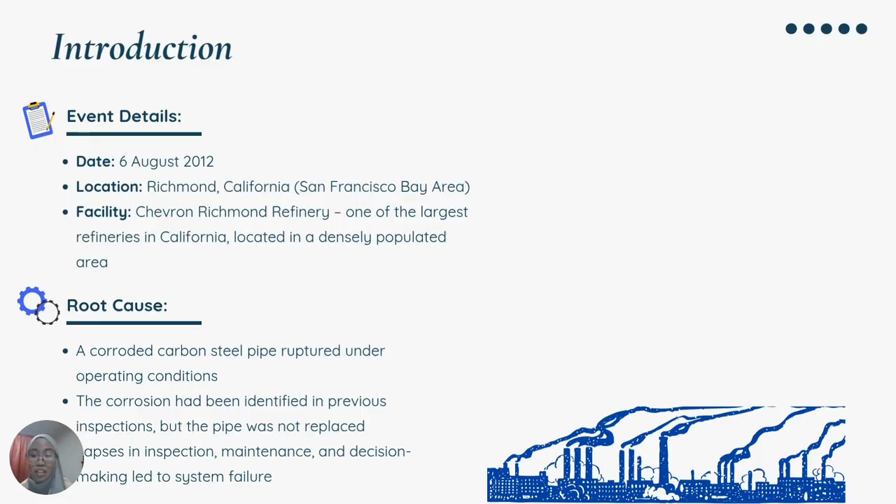Let's take a brief look at the timeline of key events. As early as 2002, internal inspection reports flagged a specific carbon steel pipe as vulnerable to corrosion. Multiple recommendations were made to replace the pipe, but they were not followed.

Then refinery workers detected a leak but decided to keep the unit running while investigating the issue. In the evening, the accumulated vapor ignited, resulting in a massive fire.

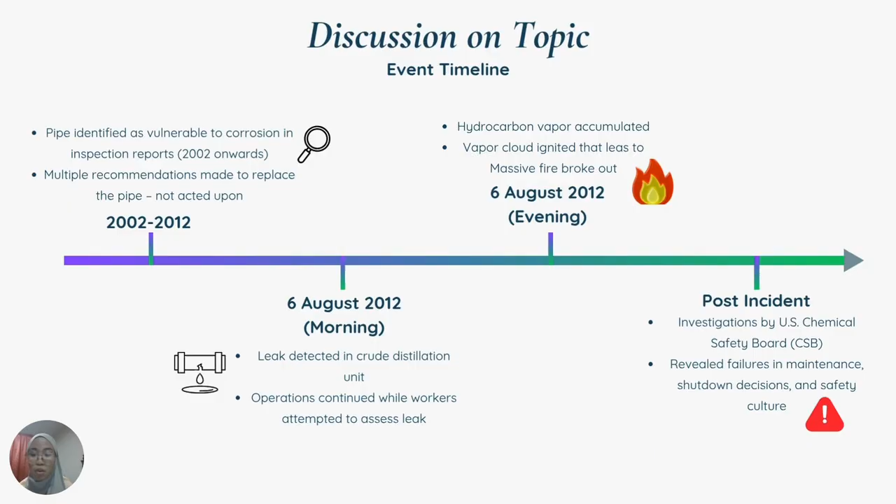Post-incident investigation led by the US Chemical Safety Board confirmed that this event was entirely preventable, stemming from long-standing technical and organizational failure. This shows not just a technical failure but also a breakdown in safety culture and decision-making.

The company continued operation even after detecting the leak, putting production above safety. The impact was serious, where over 15,000 people needed medical care and toxic smoke affected nearby communities.

This case is very similar to the BP Texas City explosion in 2005, where known risks were also ignored. Both incidents highlight the need for strong engineering ethics, better communication, and a proactive approach to safety.

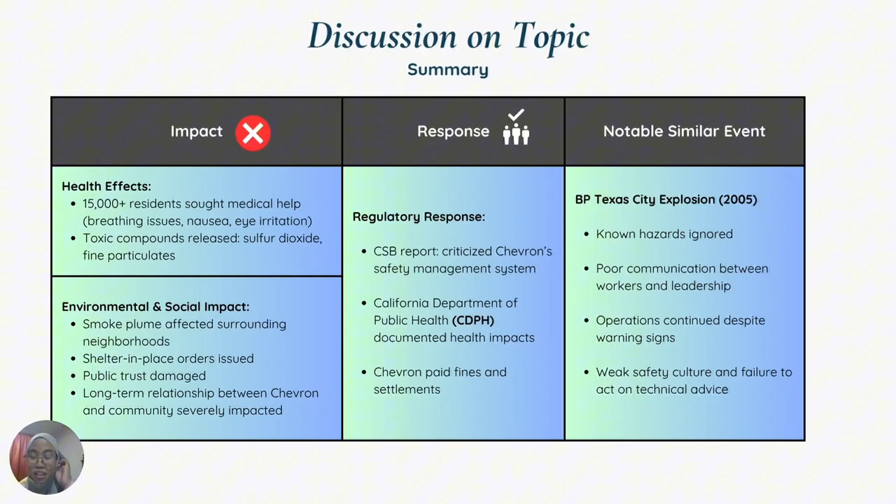Hello, I'm Iman and I will be presenting the technical issues. The leak and the rupture was caused by sulfidation.

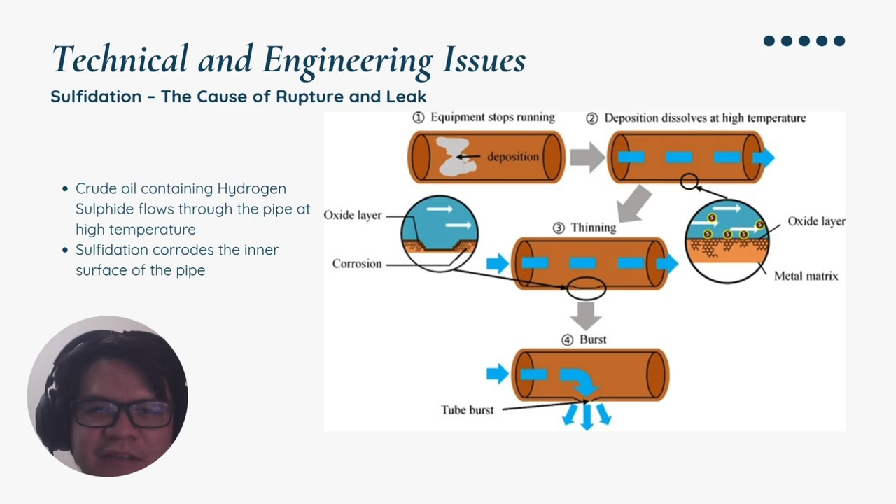Sulfidation is like corrosion that is specifically caused by sulfur under high temperature. Since the refinery unit handles crude oil, which commonly contains hydrogen sulfide, it should be expected that the material can handle it. In the 1980s, studies discovered that carbon steel pipes with higher silicon content can slow down sulfidation significantly.

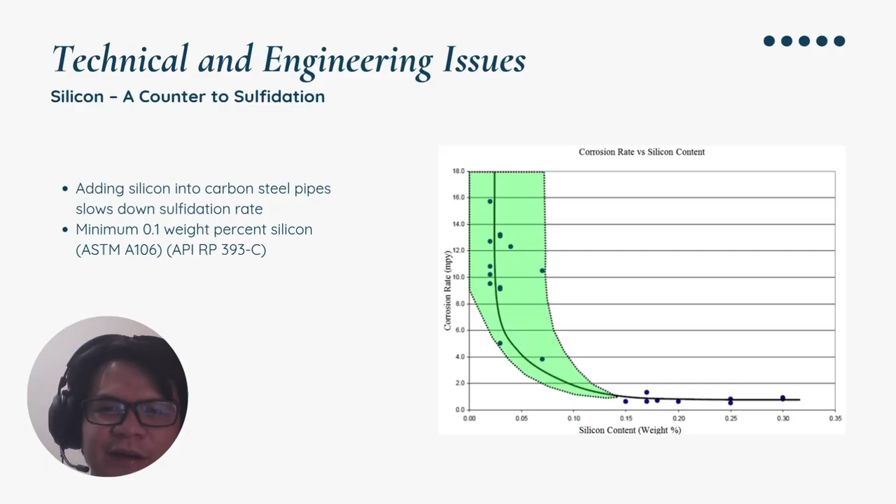Hence, in 1985, ASTM and API dictated that carbon steel pipes should have a minimum of 0.1 weight percent silicon. However, the refinery unit was built long before 1985, leading investigators to believe old pipes were possibly still being used. Investigation analysis shows multiple pipe sections measured under 0.1 weight percent silicon.

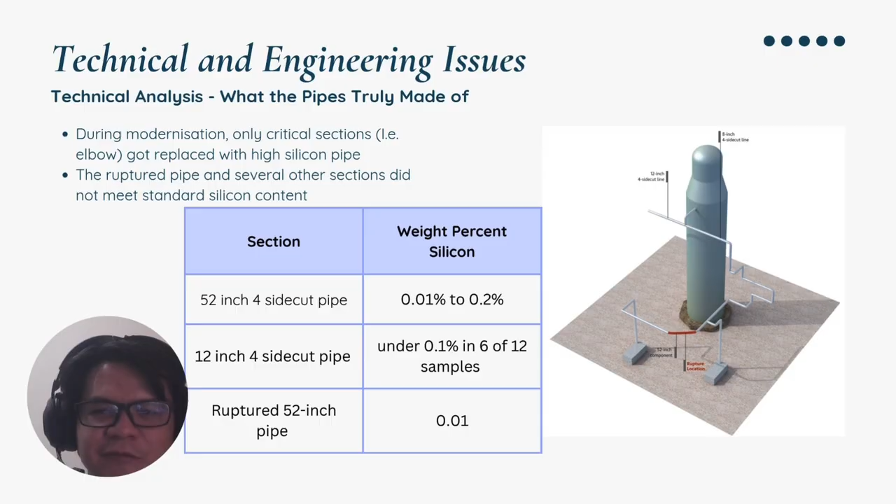So, did the entire unit remain unchanged for more than three decades? Investigators also analyzed the elbow section, which seemingly was in good condition despite being directly upstream of the rupture section, and they found that it was up to standard. That means modernization was done selectively on sections deemed critical or high load, while neglecting other sections.

Ethical reason is one of the main causes of the Chevron Richmond refinery fire, especially regarding negligence in equipment maintenance and risk awareness. The fire was caused by the rupture of a severely corroded pipe that carried hydrocarbon fluid. Upon investigation, Chevron management was fully aware of this situation but chose to continue operation instead of stopping to replace the corroded equipment.

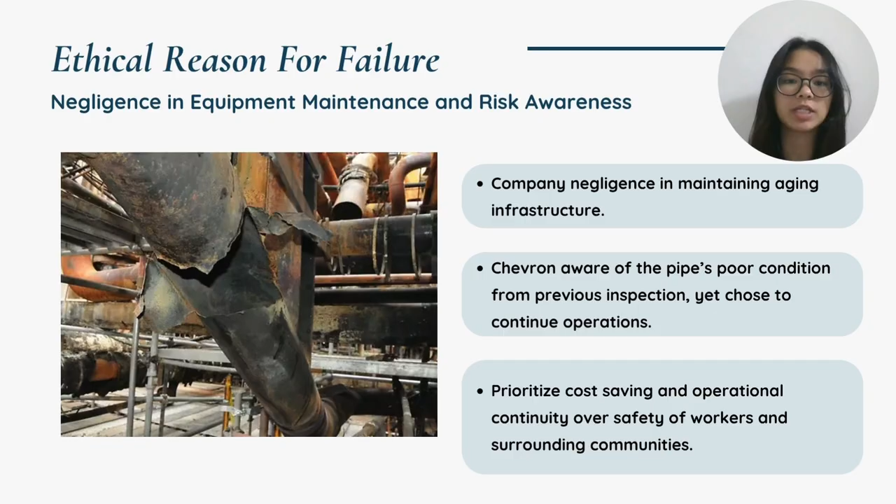This decision clearly shows that Chevron put operational continuity on top, neglecting the safety of their workers and surrounding communities. From an ethical aspect, this is a disregard for professional responsibility and the failure to uphold the core principles of engineering, which is to protect the health, safety, and welfare of the public.

Next, Chevron also had a weak safety culture, where they put economic consideration above human life and environmental responsibility. When the incident happened, thousands of residents were exposed to toxic smoke, but many reported that they received little to no warning from the authorities. This shows that Chevron lacked in emergency response and public communication.

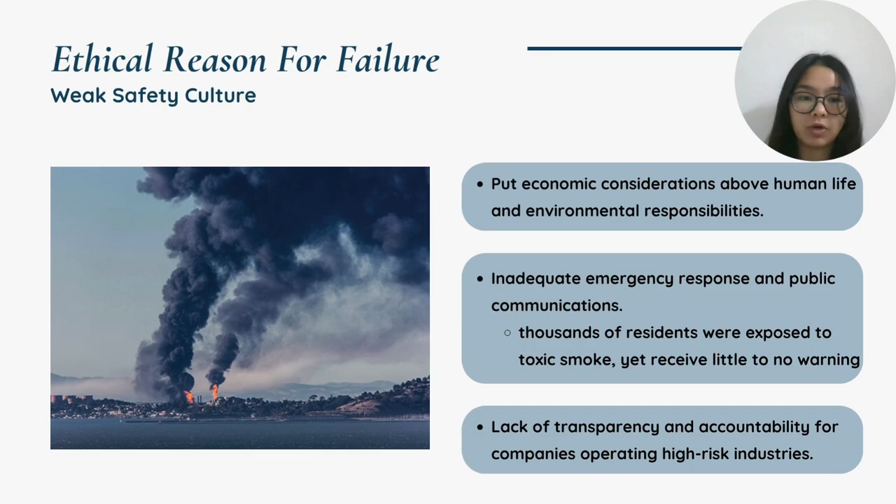On top of that, the company also lacked transparency and accountability when operating high-risk industries, which put the safety of their workers and surrounding community at risk. Lastly, even though Chevron complied with the legal requirements for plant operations, they failed to meet the broader ethical responsibilities of an organization that handles dangerous materials.

In ethical aspects, companies are expected to go beyond basic compliance with regulations, especially when human life is at stake. However, by continuing operations with ancient equipment, ignoring internal safety issues, and lacking transparency in operations, Chevron breached its duty of care. This incident is a clear example of what can happen when ethical responsibility is ignored.

Hence, this incident also highlights the importance of ethical leadership and the importance of health and safety, and most importantly, the prioritization of human and environmental well-being over economic gain.

Hi, my name is Bevin, and today I'll be talking about my recommendations to prevent future problems such as the Chevron refinery fire incident and other oil and gas related incidents. These recommendations are based on the root causes that led to the Chevron incident.

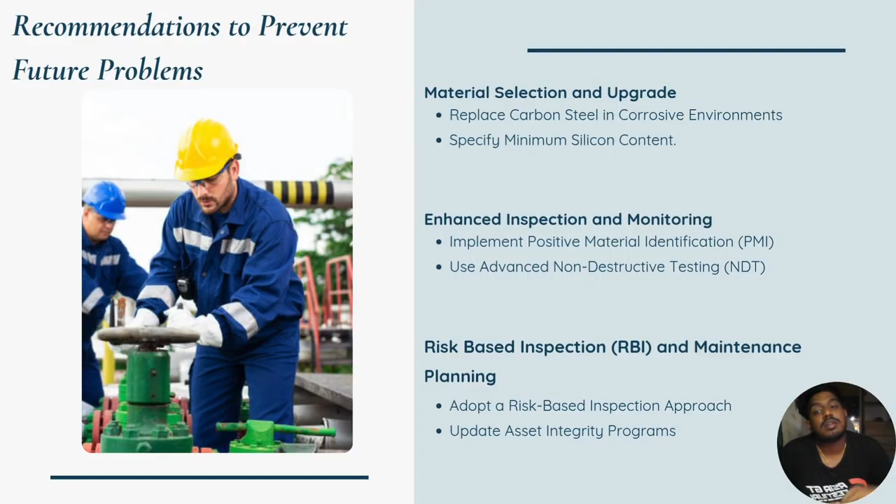Thank you. In conclusion, the Chevron Richmond refinery fire could have been prevented if the known corrosion risk had been addressed earlier. The pipe that failed had been flagged in previous inspections, but no replacement was done. This reflects a gap in both material standards and inspection strategy.

Our recommendations target three main areas. Firstly, replacing vulnerable carbon steel with corrosion-resistant materials. Secondly, improving inspection methods using PMI and non-destructive testing. Lastly, adopting risk-based inspection and updated maintenance planning. These steps are essential to uphold safety, prevent future failures, and maintain compliance with engineering standards.